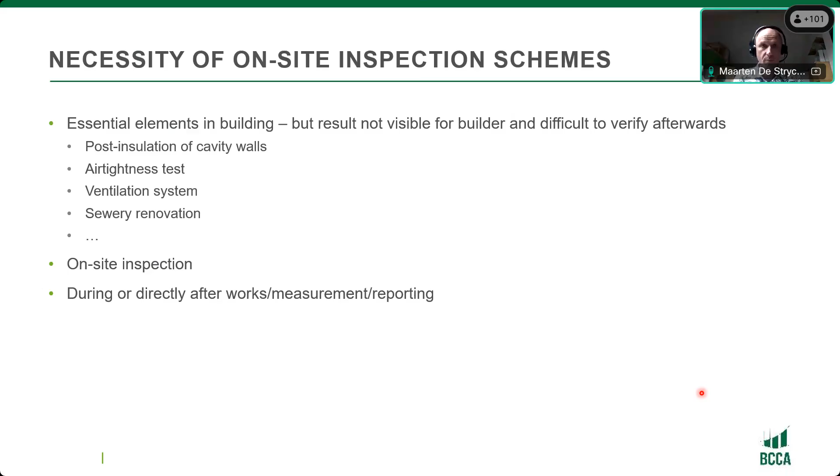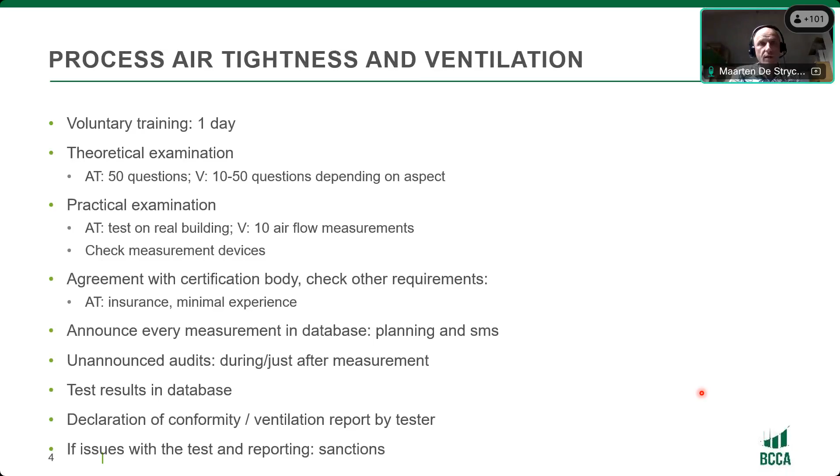So for these kinds of works, we do an on-site inspection during or directly after the works, or after the measurements, or after the reporting for the ventilation systems, for example. I will not go into detail about the process in airtightness test and ventilation inspection schemes. These are documented in papers available in the Airbase from AIVC, and we discussed it in previous presentations. So I'll go over to the results of the quality frameworks for airtightness and ventilation.

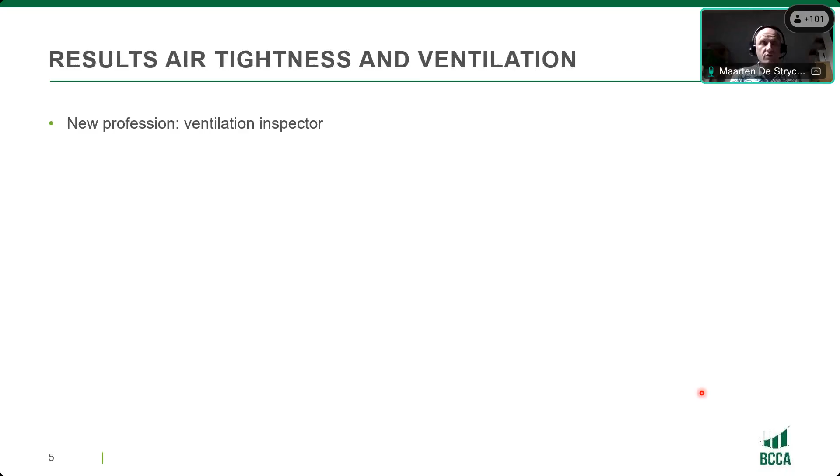For ventilation, we created a new profession which is the ventilation inspector. So besides the ventilation installer, there are now in Flanders ventilation inspectors doing specifically inspections on ventilation systems. We created a new profession.

There was an evolution in measurement devices. As you now have to measure airflows, manufacturers of measuring devices also made an evolution, making the work of the ventilation installer, but also the ventilation inspector, more easy by giving them specific measurement devices.

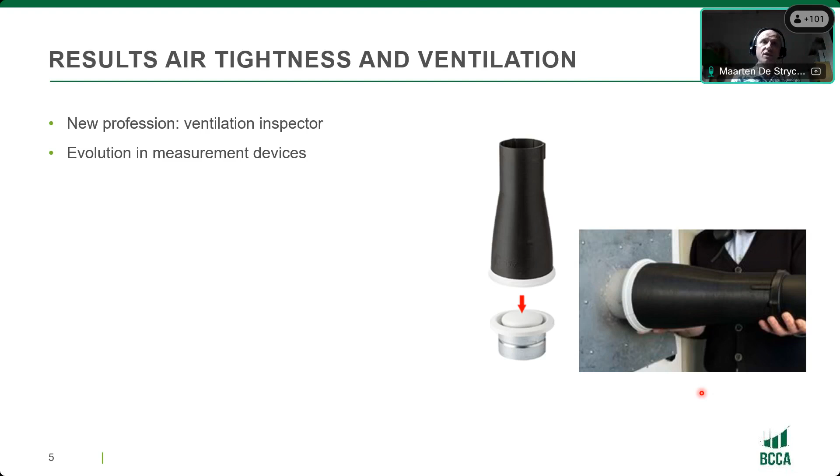You see that it's not always deviating in the same direction. So there is no bias in a direction where the inspection or the airtightness tester is reporting systematically a lower leakage flow than what is measured during an audit. So we have an effective auditing system in place.

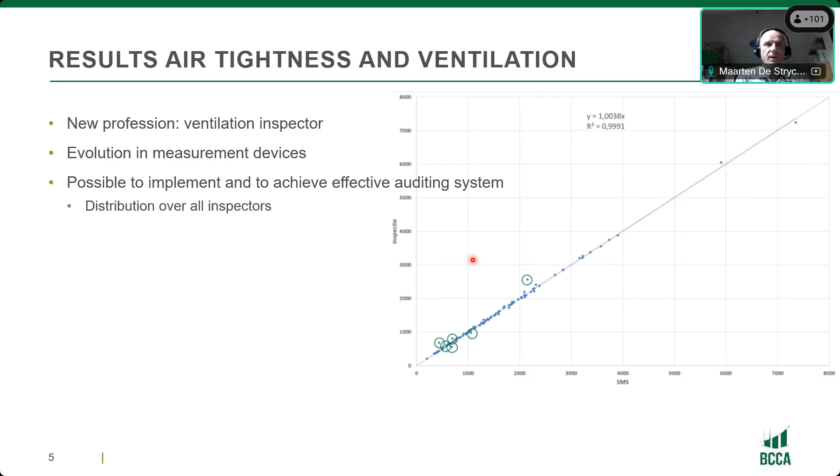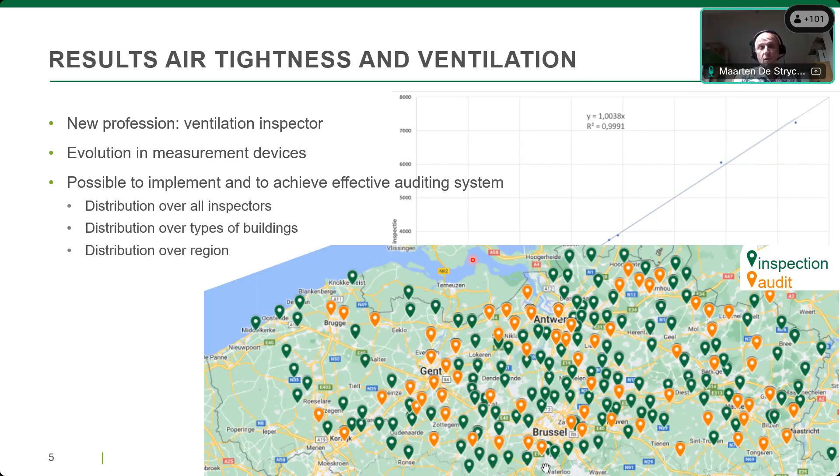So you can have a distribution over all inspectors or all airtightness testers. You can have a good distribution over all types of buildings. You can have a good distribution in speaking about the region. Here you see a map of Flanders. The green dots are all places where a ventilation inspection took place in 2023, and the orange dots are where we did audits. So we can have a good distribution over the region, and also a good distribution in time.

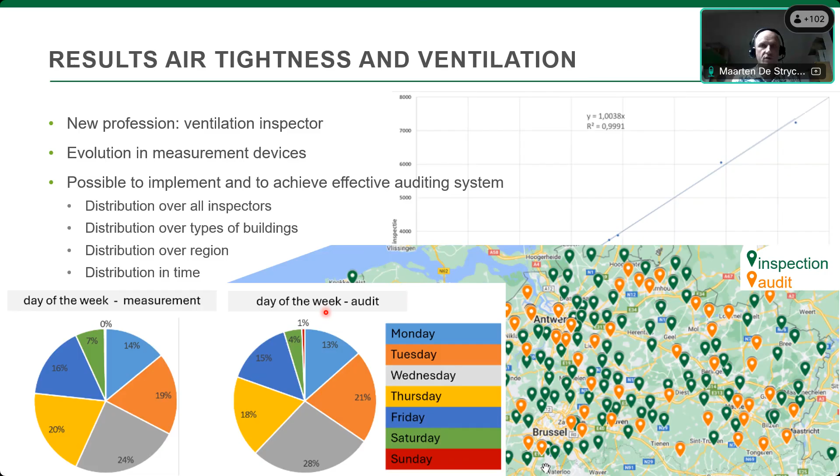When we started these quality frameworks, some people were very skeptical, saying that inspections or airtightness tests would only be done during the night and during the weekend when you cannot check whether it's done right or correctly. But you see here about 7% of the measurements or inspections are done during the weekend, and we realize about 5% of our audits also during the weekend. So we have a good distribution in time of our audits.

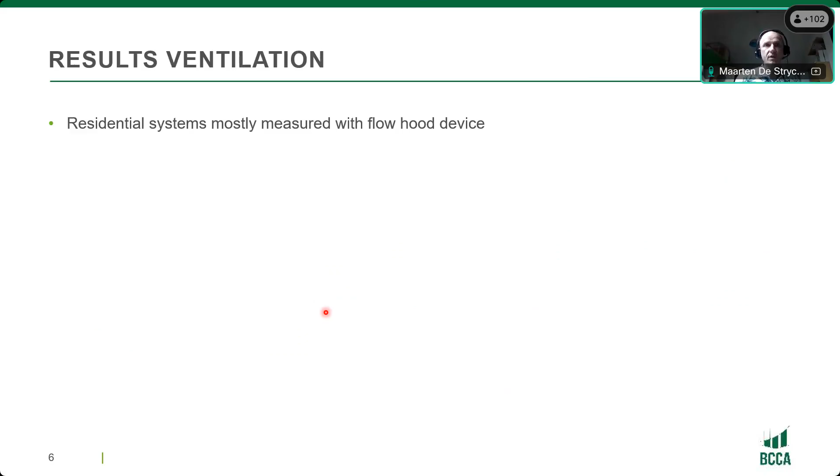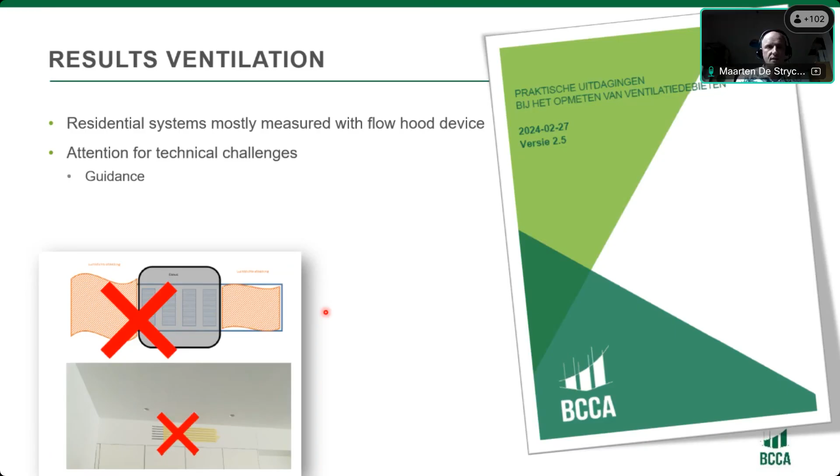Specifically, some results of the ventilation quality framework show that in residential systems, the flow hood device is the most popular measurement instrument. But you have to pay attention to some technical challenges on site, because people get very creative, and you have to develop some guidance like what is allowed and what is not allowed, and how you can measure in specific situations. You have to develop that because this is not yet mentioned in the standards at this moment, and you have to do a broader communication and involve all parties.

The latest thing we did was writing an article in a newsletter for kitchen installers to make clear that these kind of valves are very inefficient from the ventilation and indoor air quality point of view, but also very difficult or not possible to be measured by a ventilation inspector. So to make this clear, we also made a specific communication. So you have to involve all parties if you want to install an inspection scheme on ventilation.

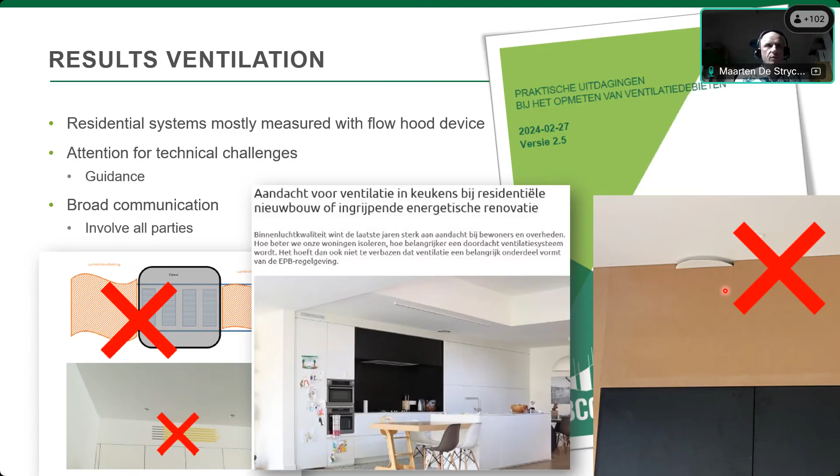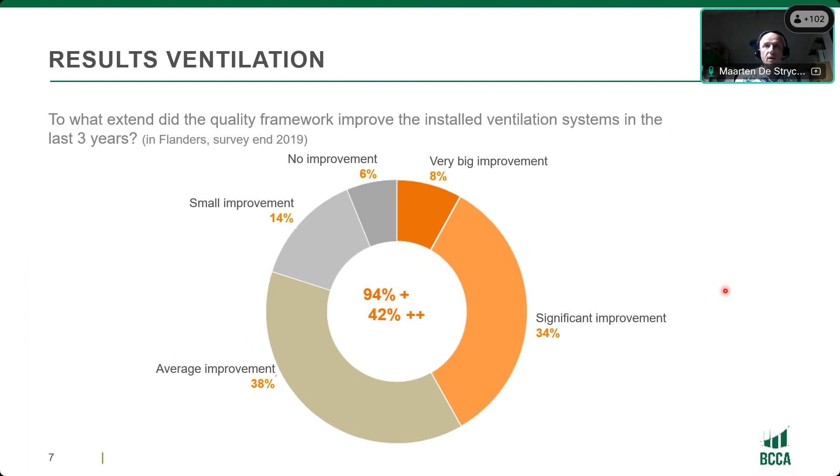What are the results? So the quality framework for ventilation started on the 1st of January 2016, and by the end of 2019, we organized a survey, and one of the questions was, to what extent did the quality framework improve the installed ventilation systems in the last 3 years? And the result is that 94% of the respondents say that there is an improvement in the quality of the ventilation systems, of which 42% say that there is a significant or better improvement for the ventilation system. So we can achieve good results by installing an inspection scheme on ventilation systems.

What are, for me, crucial elements in an inspection scheme? Well, you have to create a management framework. You have to have a dedicated team which has different skills, like technical skills, knowing how a ventilation system is designed, how it is maintained, how it is installed, how ventilation airflow rates can be measured, how you can organize such an inspection scheme. Different skills that you have to bring together, and you have to develop clear rules to make it clear for everybody involved in the scheme what is expected during an inspection.

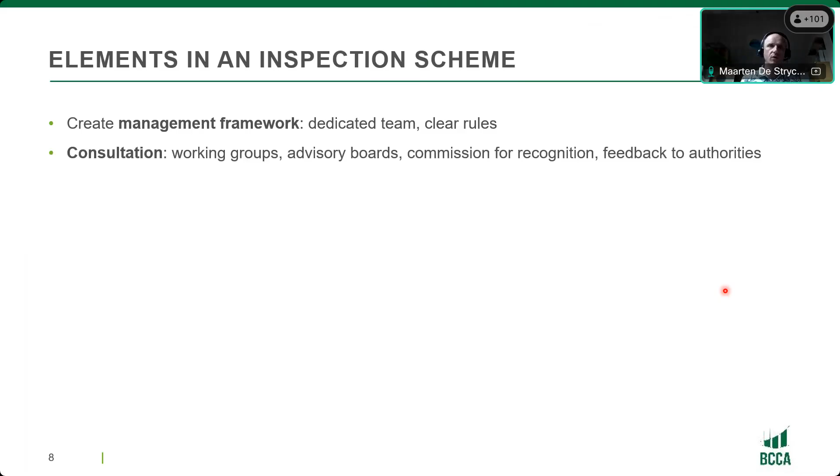You have to do a lot of consultation. You cannot overestimate the amount of consultation you have to do if you install such an inspection scheme. You have working groups, advisory boards, organize a commission for certification or recognition, and give feedback to the authorities if you put it in a legal framework.

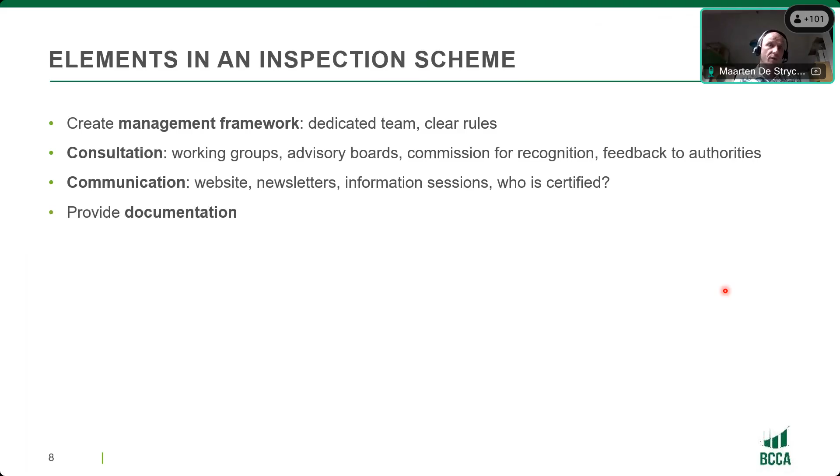You have to do a lot of communication, because a lot of parties are confronted with such an inspection scheme. Write newsletters, set up a website, give information sessions to the broader public, make clear who is certified and who is not, and what they're certified for, provide documentation, follow standardization and international networking, and you have to create compelling boundary conditions. If you leave it on a voluntary basis, then nothing will actually happen. You have to find some way to motivate people to use this inspection scheme.

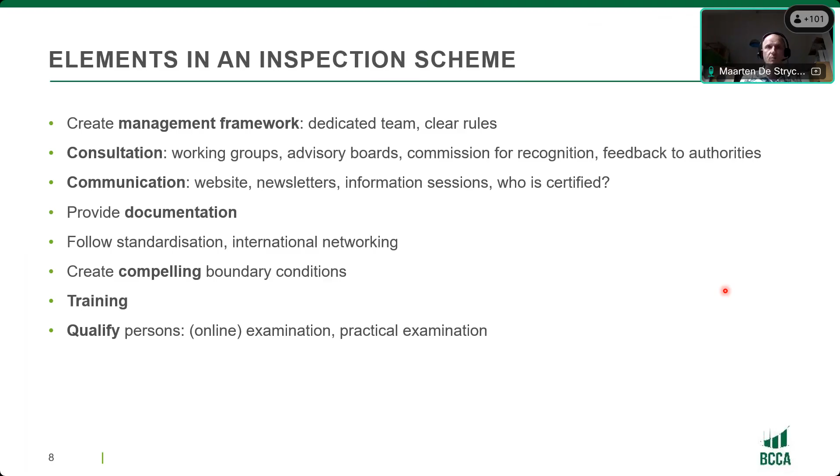You have to provide training, not only to ventilation inspectors, but also to a broader public, like architects, ventilation system designers, manufacturers. You have to put them all into specific training sessions, and you have to qualify persons, and especially when you're trying to measure ventilation airflows, a practical examination in which people prove that they have the right devices and they know how to use them properly can be very useful.

Yeah, we're talking about databases, making results available, consultable. Then you also have a web application, because you have to make this database accessible, and think about who can access these documents, especially when you're working in a legal framework, so that authorities can access the reports. And you have to organize some kind of surveillance on the reporting, because if you leave it over to the market, you will maybe not have reliable results in the database, and you have to organize some on-site checks and also desktop inspections, from which you can learn a lot about how inspections or measurements were done.

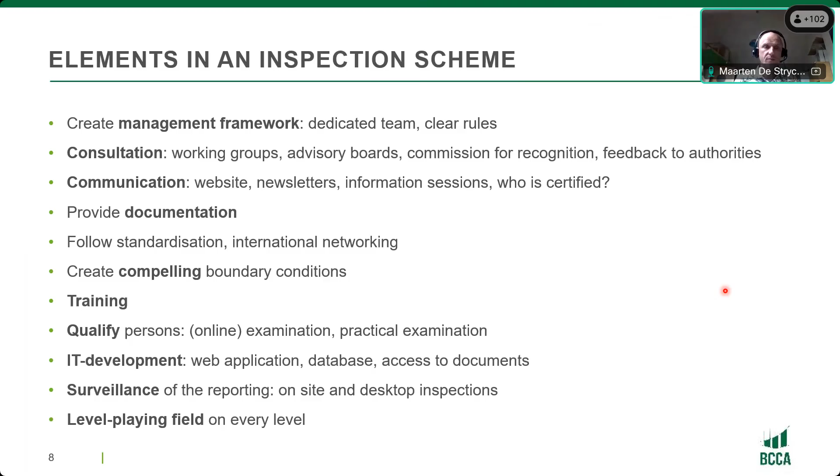And last but not least, you have to create a level playing field on every level of the inspection scheme. So if you allow different organizations to organize inspection schemes, then you also set minimum requirements for all of these parties that are organizing this.

The second part of my presentation is about our experience with ventilation in non-residential buildings. Before that, I have to explain that there already exist different sets of requirements in Belgium. For new non-residential buildings, there is the EPB reporting, which only contains design values, but there is no mandatory check on site of these ventilation flow rates.

For existing non-residential buildings, a simple visual check is foreseen of whether there is some ventilation available in the building, but there is no real evaluation of the effectiveness of the ventilation system, nor is it foreseen to measure the airflows. Besides these regional regulations, there is also federal regulation on well-being in workplaces.

So this is limited really to workplaces. And there's a requirement in terms of minimal airflow rate or maximum increase in CO2 concentrations. And besides that, the Ministry of Health published a federal law on indoor air quality in public spaces. So this is limited to public spaces, which is complementary, for example, to workplaces. And then there we aim at a voluntary labeling of spaces where it is the aim to communicate about the indoor air quality in these spaces based on CO2 or the ventilation rates available in these spaces.

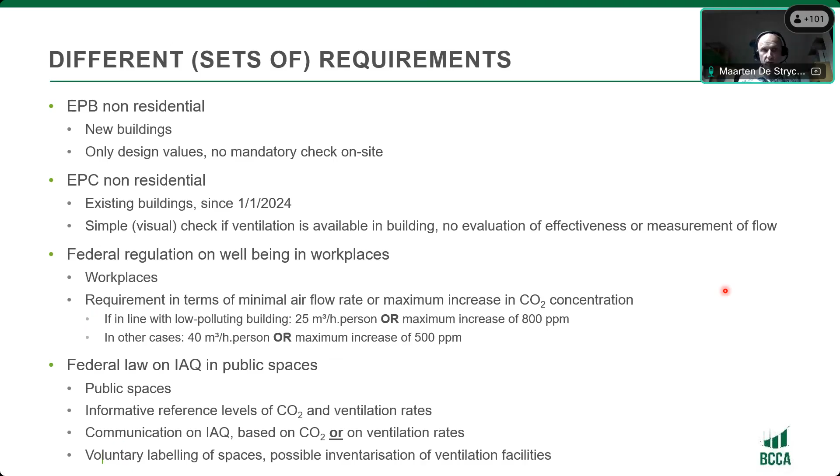So this is regrouping what I said on the previous slide in a scheme. I'll not go into detail because I'm running out of time. What we see for challenges for inspections in non-residential ventilation systems is you have a lot of different types of ventilation systems. So they might be hybrid, complex systems, or even non-defined, where you have only extraction of polluted air, but it's not clear how there is air provided to the space. You have an interaction with HVAC systems, often in non-residential systems, where you can have questions about the share of fresh air that is distributed in these spaces or in these buildings.

You can have complex control systems based on manual interventions, interacting with a clock system and some sensors built in that can collaborate or just distract each other, so that the system is maybe not functioning at all anymore. You have a lot of buildings, existing and new buildings, with different levels of ventilation or different requirements historically in these buildings. You have a lot of spaces with different activities inside. For example, the pollutants in a restaurant can be very different from those in a gym, as I will show later on in the presentation.

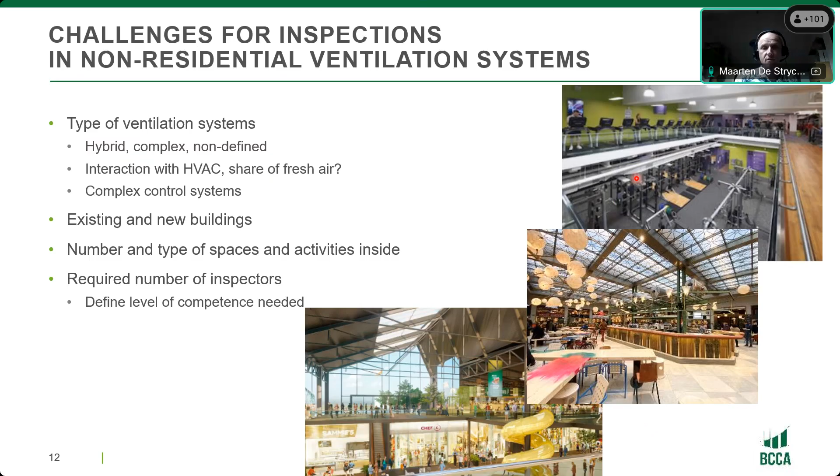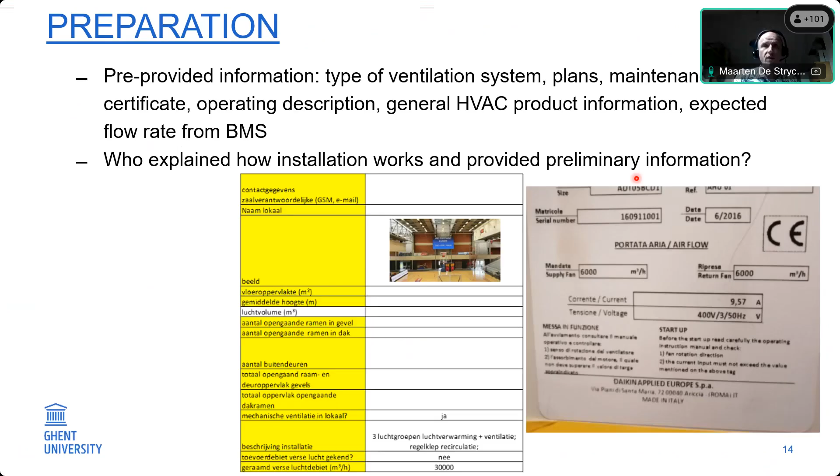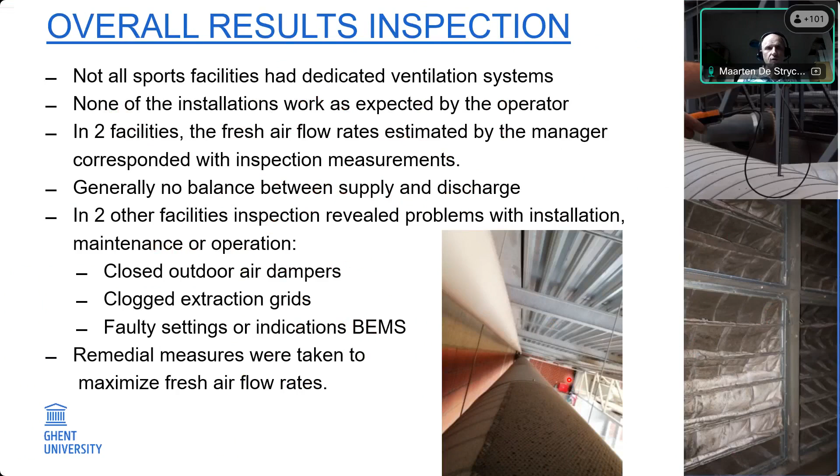And you have to think about the number of inspectors required to set up such an inspection scheme. So it might be interesting to think about different levels of competence needed depending on the complexity of the ventilation systems inside these buildings. Ghent University did some test events in sport infrastructure. I will not go into detail, just skip to the results, but what was clear is that none of the installations worked as expected by the operator. There is often no balance between supply and extract air. And we have a lot of problems with maintenance of the ventilation system. So closed air dampers or clogged extraction grids or faulty settings in the building management systems.

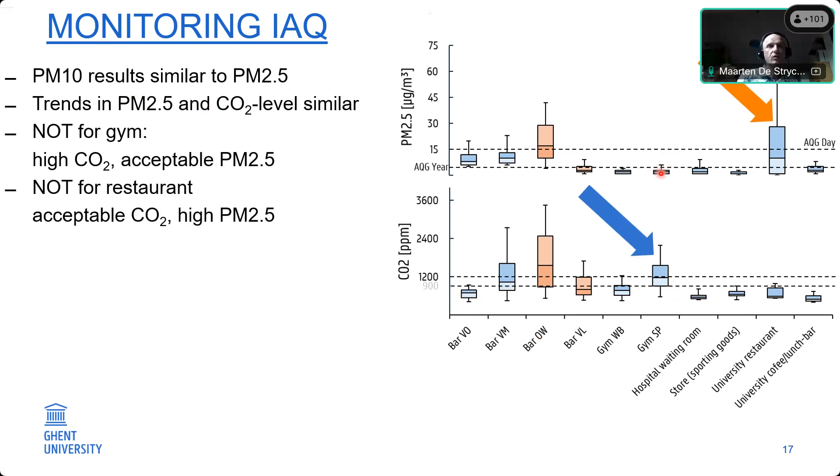You can also have a lot of questions about ventilation effectiveness. And I just want to go to the recent article that was published by Klaas de Jonge and Arnold Janssens, where they did some monitoring on indoor air quality by measuring PM10 and PM2.5 concentrations in the indoor air and the CO2 level. And for most of these spaces or situations, the CO2 level is very similar or has the same trend as the PM2.5 concentration in these rooms, except for the gym, where we have high CO2 concentrations, whereas the PM2.5 concentration is still under control, which might be due to the activity of the human beings in these rooms. And the restaurants are also different, where we have high PM2.5 concentrations and the CO2 level is under control. So this depends on the activities that are happening in the kitchen of the restaurant, of course.

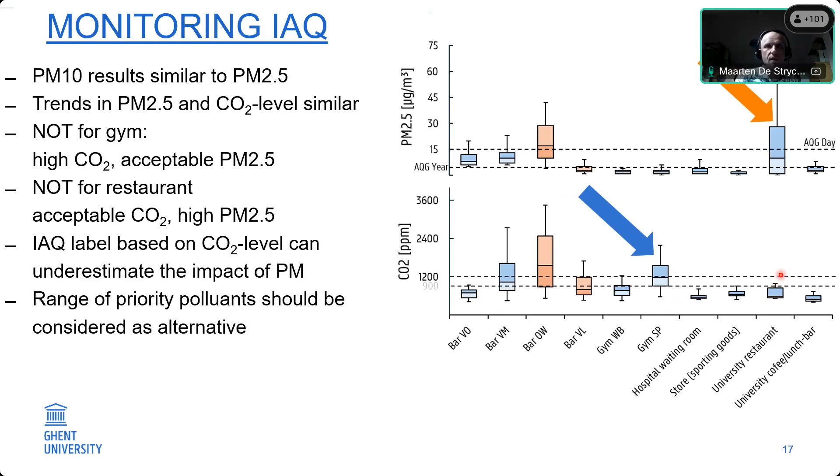So the conclusions are that an indoor air quality label based just on CO2 level can underestimate the impact of other pollutants. So you should define a range of priority pollutants to be able to say something about indoor air quality in these spaces. So to conclude, for residential applications, we have a ventilation inspection scheme operational in Flanders for almost 10 years, so we have some experience. It is possible to set up an inspection scheme. There are some prerequisites that I showed in the slides, and you have to keep the pressure on correct reporting if you want reliable results in the database.

For the non-residential ventilation systems, I think we can say that indoor air quality is not always bad. There is often some kind of ventilation system present, but there are still some challenges when we have to really certify the indoor air quality or the effectiveness of the ventilation system on the indoor air quality.